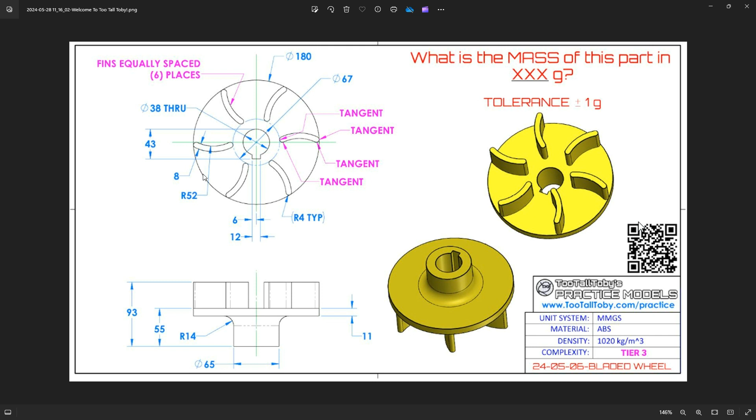This is on Too Tall Toby's practice models labeled May 6 bladed wheel, and this is going to be in millimeters, but this is a simple model. Basically has a wheel here, and then we have some keyways that we have to put on the model, and then we have some fins that we have to design that have an inside radius here of 52 and a thickness of 8. So let's go ahead and show you how to build this in IronCAD.

So let's hop over to IronCAD, and what I'm going to start off with is I'm going to drag and drop a cylinder out to start with, and we know the overall size of that guy is 180 for the diameter, and the height of that is 11 millimeters to set that off. So that gives us our starting point here.

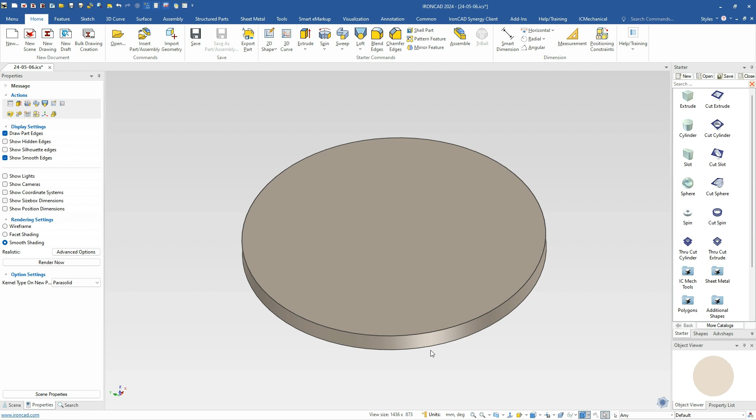Next we'll go ahead and put our boss here on the bottom. On the center we can drag and drop right to the center point, and we can now set the diameter of that, which is 65 for that value, and we know the height of this is actually 55 from the opposite edge inside of here, or we can just subtract that value. So it's set at 50 right now, so we just say it's 44. 55 minus 11 is 44 to set that height. So that will give us that value there.

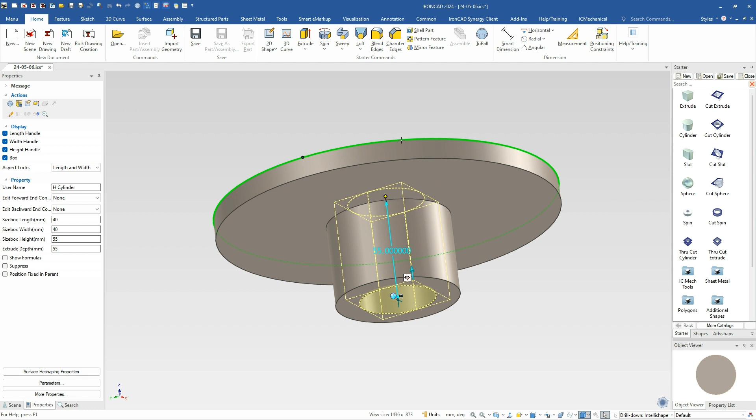And next we'll go ahead and do a cut cylinder that we can drag and drop here, and we can align that to the bottom edge or just pull it through either way. And we want to set the diameter for that hole is 38 millimeters for the hole. Next we'll go ahead and add a blend here as well, so we'll just go ahead and blend this edge here, which has got a 14 millimeter on that, or fillet, however you like to classify that.

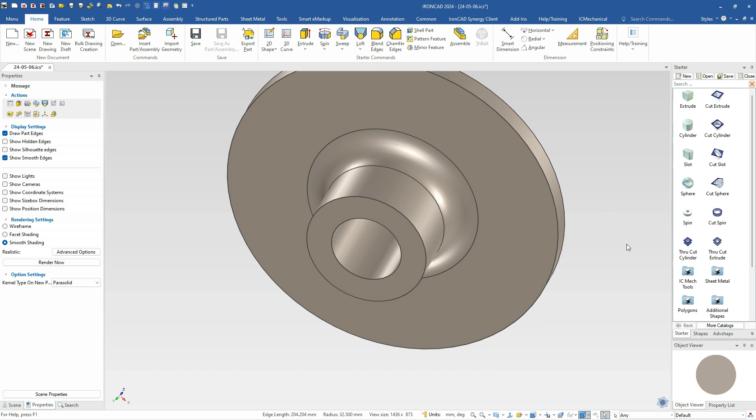And next we're going to do the keyway. So we're going to do an extrude cut here, and I'm just going to pull that right onto the center point, and we can see our shape here that's dropped in the space. And what we're going to do is actually set the width of this, which by right click and dragging I can set that symmetrically, which I want to set that to 12 millimeters.

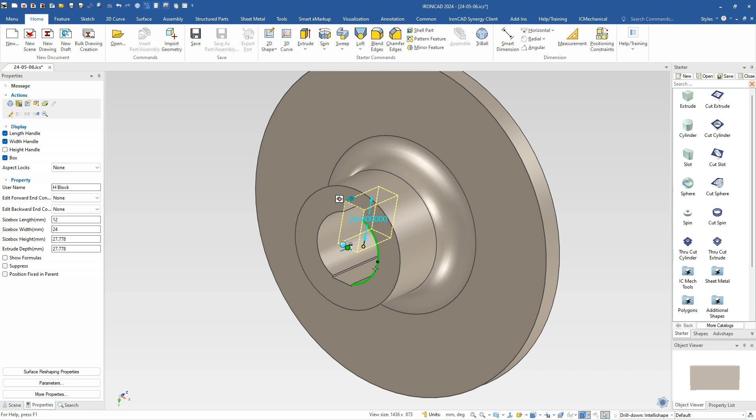The other thing is we know that this has actually got a reference from the bottom tangency point, so I'm just going to set that there for an offset location and set the other handle to be 43 to set the height of that cut or the keyway there. Then I can just pull this handle up into space or snap it up to the center, it doesn't matter. But basically that gives us our dimension for our keyway.

Now that we've got that built, we can now do our blade here. So we're going to go ahead and do an extrude on this model, and we're going to select our part, and we're going to put a sketch. So we're going to say create a sketch. I'm going to create it right on that center point there and hit OK to apply that.

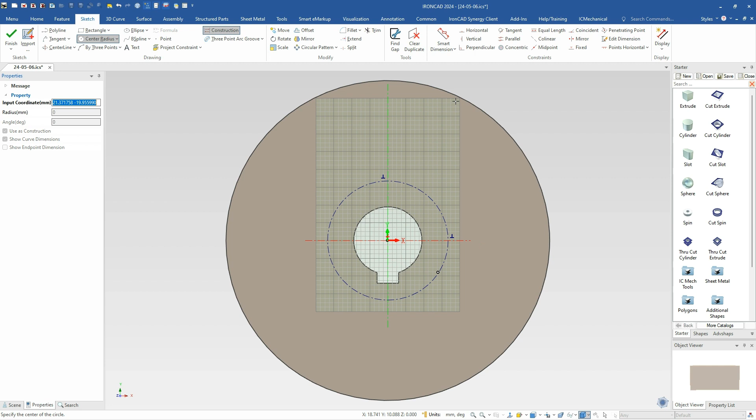So now that we've got this set, we need to build some construction geometry, and one is going to be a circle that we need to have set to a value of 67. So that's a diameter, so divided by 2. That'll give us our diameter for that. And we also want to go ahead and project this outer edge here for reference. And if we want to put a dimension on this, we can, just to show that. That's set to 67 diameter there.

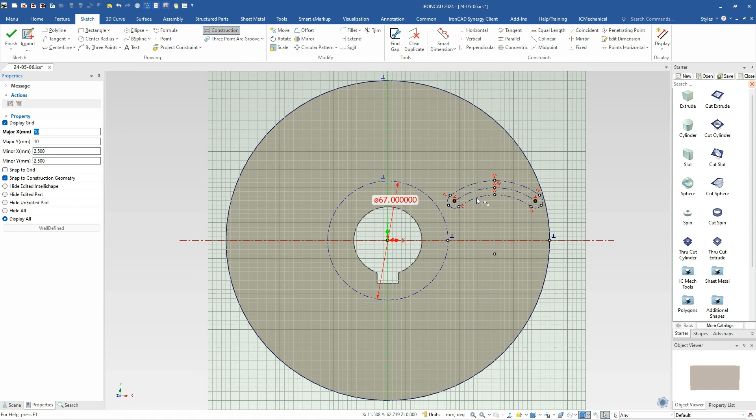Next, we want to have the groove. So we have different types of grooves. We have 2-point grooves. We also have a 3-point arc groove, which we can just simply drag out here and draw this thing. So we're just going to draw 2 points and an arc somewhere in there, and then we can set the value for the width. In our case, we want to set that to 8. And I forgot to turn my construction off, so we can just select this outer line and say use that as real geometry instead of construction.

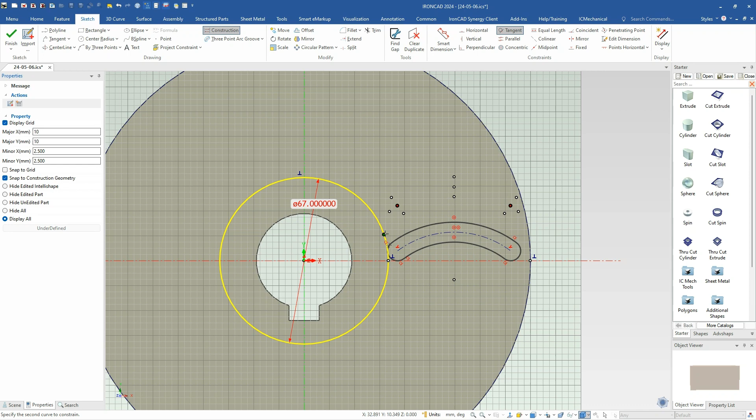So now that we've got this drawn, we can now put all of our constraints on to position it where it needs to go. So we're going to go ahead and do our tangent constraints, because we know there needs to be a tangency from this arc to here, and from here to here as well. And one thing we want to do is set that value to make sure that it maintains at 4, so we just click that radius value there is 4. We can also do the same thing on the other side for the tangency, so we'll select that to this arc and this tangency here down to here to set that.

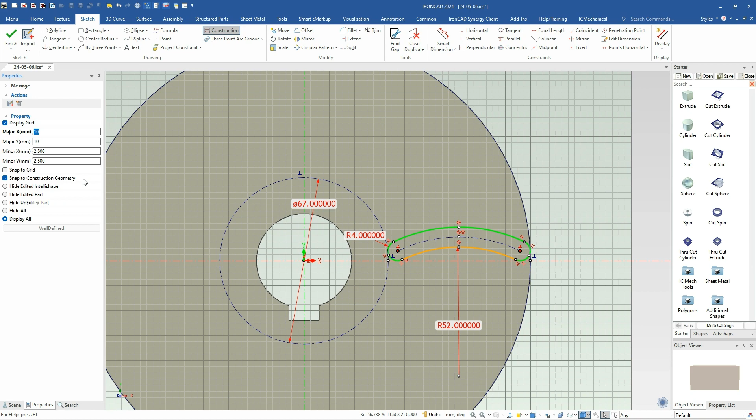And last, we just need to set the value for this radius, in which we have a set value of 52 to drive that. So that basically just builds our groove for us nice and easily, no real difficulties there. Basically maintains our tangencies, our radius thickness, and our requirement for our radius. So we'll go ahead and hit finish on this. And we know this has a height value, actually it's going to be 38 millimeters because it's 93 from the bottom. So if we subtract the 55 from the 93, that gives us a 38 value, and hit OK. So we'll just set that there.

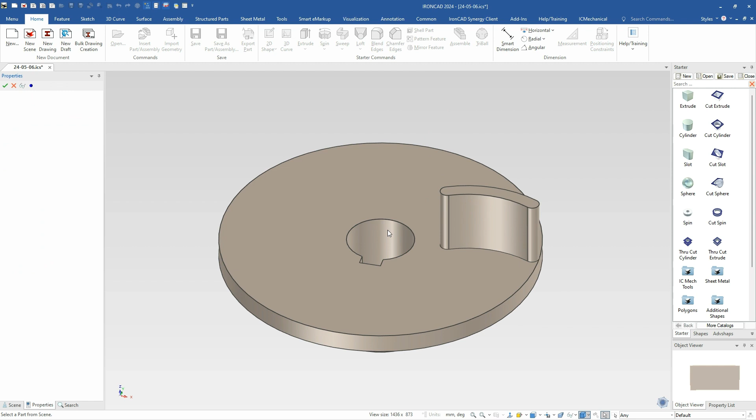And last, we're going to go ahead and do a pattern feature. So we're going to go ahead and hit the pattern feature command, select our part. In our case, we need to select a circular pattern, select an axis, and then we're going to select our feature, and we would have a count of 6 of those evenly spaced, and we'll hit OK to apply those. So that will build us basically our bladed wheel inside of IronCAD. Fairly easy to do. No real difficulties inside of IronCAD to do that.

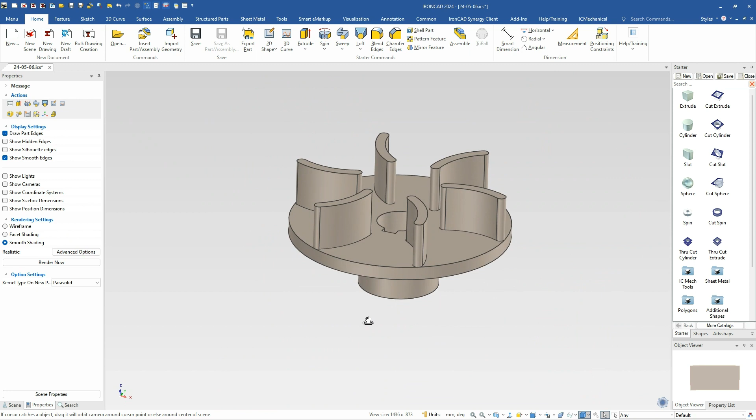So let's just go now and set our mass density as 1020 for this model. If we tab out, we should see a mass of 482 for this model. So very easy to do in IronCAD. Again, mainly drag and drop, but then we use the cross section for building our nice little bladed shape there, which is an arced groove, in other words.